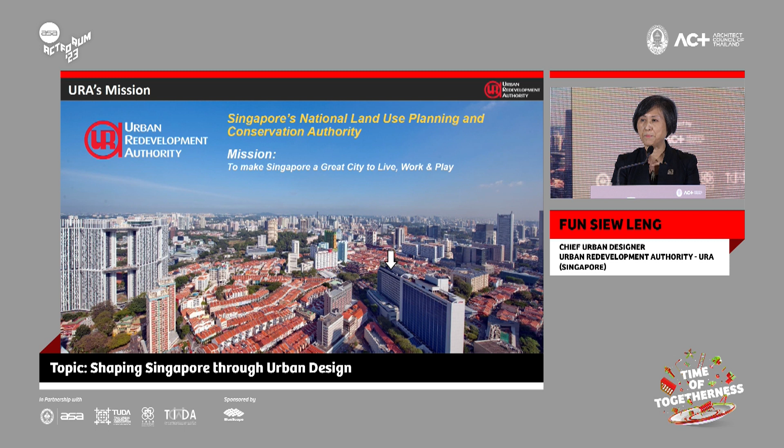But first, a short introduction. The Urban Redevelopment Authority of Singapore is Singapore's national land use planning and conservation authority. Our mission is quite simply to make Singapore a great city to live, work, and play. At the URA, we undertake land use planning, urban design, and development control work. We also coordinate infrastructure planning and promote the conservation of our built heritage.

Within URA, we also have a design and planning lab, which is a very recent setup to leverage on digital technology. So I will share a little bit on that later on how it has helped in our planning and urban design work.

To facilitate the implementation of our plans, state land is released for development through what we call the Government Land Sales, or GLS program, which I will also make some reference to later on. We also carry out place management of key areas in Singapore, such as at Marina Bay, and we also promote architecture and urban design excellence.

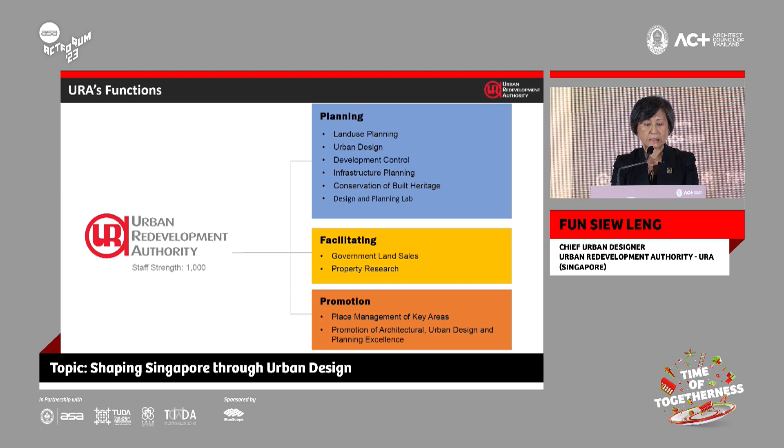To give a context, Singapore is a small island with a land area about 730 square kilometers, which is about half the size of Bangkok City. As you can appreciate, the combination of land scarcity and lack of natural resources remains a key existential challenge for us as planners. Our population is now at 5.6 million, which results in a population density slightly higher than that of Bangkok's.

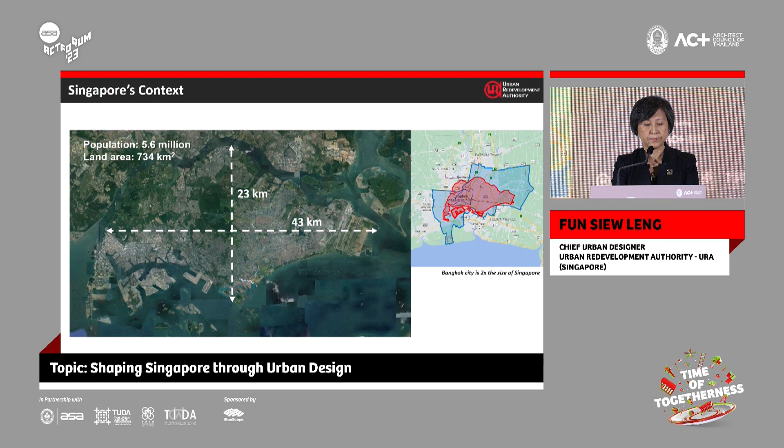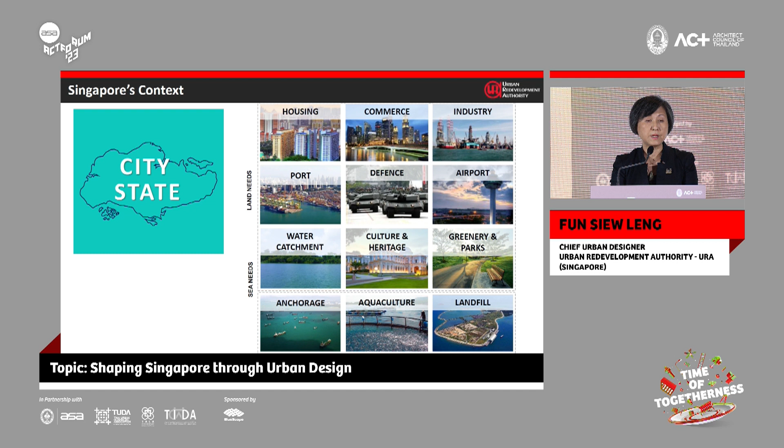Singapore is unique from other cities because we are both a city and a country. Within our very limited land area, we have to accommodate the many functions of a city, such as housing, commerce, and industry, as well as the needs of a country, such as airports, seaports, defense, and water catchment areas.

In order to meet the needs of the city-state, prudent planning for sustainable growth has been a necessity for Singapore from day one. We need to make sure that we balance across economic, social, and environmental considerations, and that our plans are flexible, resilient, and inclusive.

Our plans are guided by a systematic planning and development system which comprises 4 key components. There is the integrated long-term planning process and master plan, which are the plan-making components. There is also government land sales and development control, which help us to transfer our plans to reality. Urban design is done at the level of the master plan to help translate our long-term vision into implementable plans and policies.

To optimize its land and airspace, Singapore has to build denser and taller. Therefore, urban design is important to ensure that the living environment continues to remain attractive and offers a high quality of life.

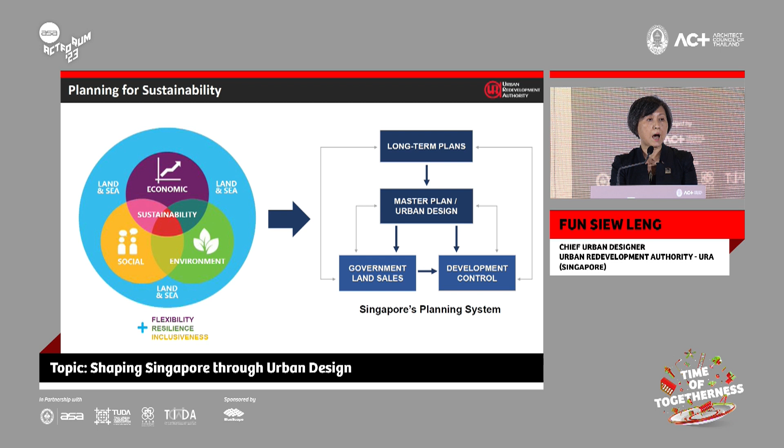There are 3 broad aspects that we consider in bringing our plans to reality. Urban design is a highly contextual discipline, and urban design interventions can only be successful when they address the specific local needs and issues. Our planners and urban designers strive to adopt a human-centric approach in our work, as ultimately we are designing for people.

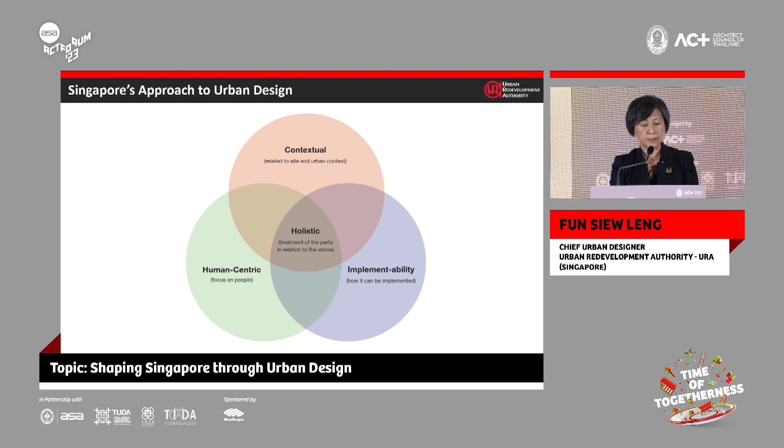To implement our plans, we have to leverage the use of policies and planning levers, which I will also discuss later on. We aspire for Singapore to be a distinctive, dynamic, and delightful city. Hence, we seek to achieve these outcomes through urban design that operates at the macro, meso, and micro scales, from sculpting skylines to streetscapes and public spaces.

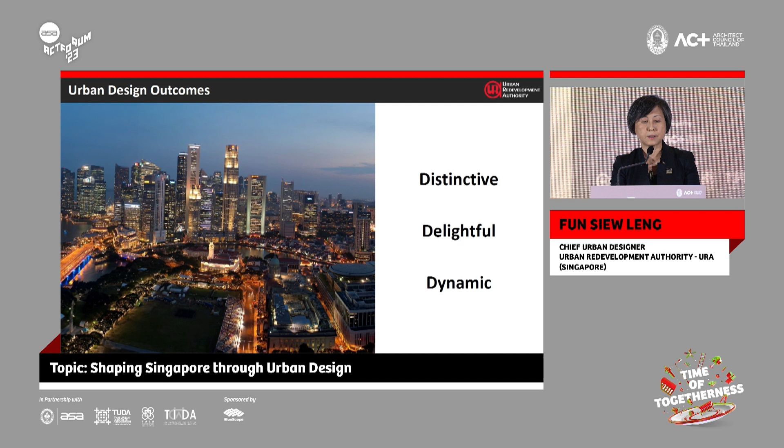At the macro scale, urban design covers the structure of a city, such as transport planning, land use zoning, development intensity, infrastructure network, and understanding the character of its various districts.

We have developed city-wide structure plans over the years, which serve as the guiding framework for URA's urban design work. They highlight how each district in the city can have its own distinctive character based on its geographic, natural, and heritage assets.

One of the most significant plans guiding Singapore's urban design is the seminal Central Area Structure Plan done in 1985. It was a comprehensive long-term plan for the Central Area that remains relevant today. The structure plan sets out in a clear hierarchy to guide rapid development in the growing city.

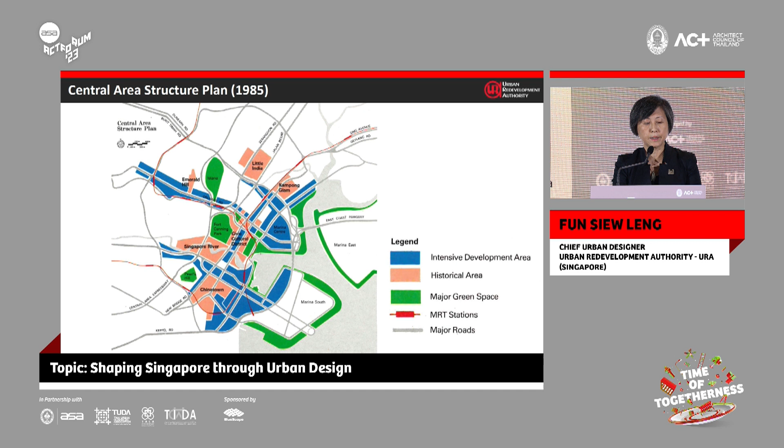The plan proposes to retain the existing historical districts and features and to concentrate new developments within these intensive areas shown on the plan. Moving from the structure plan, the district character plan defines the various districts in the central area based on their predominant land use, positioning, and geographical context.

Given that urban development of Singapore started in the city, urban planners and designers do not work on their plans and design from a clean slate or from tabula rasa. To illustrate the urban design plans and guidelines for Singapore River, one of the key districts in the central area, take reference from the presence of the river and the low-rise conserved buildings flanking it, ensuring new developments are kept low-rise at the riverfront while taller buildings have to be set back one block away from the river.

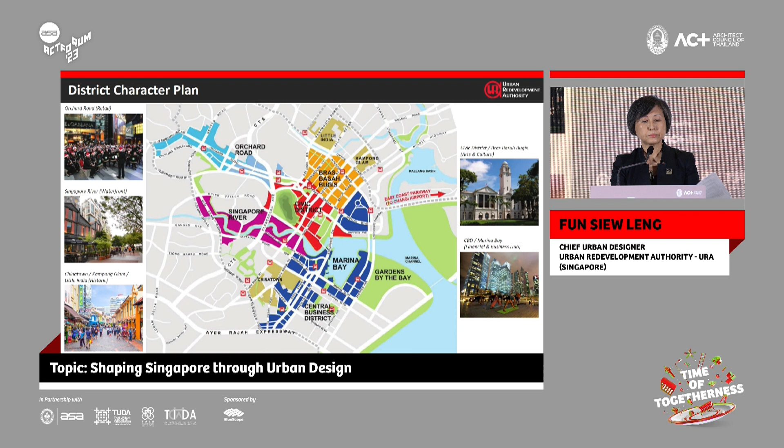Another key plan is our conservation plan. As we continue to develop, we are also mindful that our built heritage is a valuable reminder of our history and roots. URA's conservation plan identifies the areas with buildings with heritage value and ensures that new buildings or redevelopment within or near these areas will have to complement the existing conserved buildings. This plan has allowed Singapore to remain distinctive with our own identity.

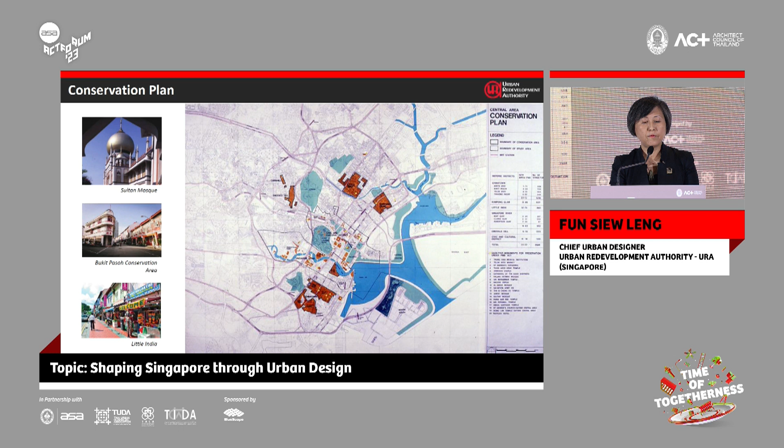To date, we have conserved more than 7,200 buildings. Many of these are in entire districts like Chinatown, Boat Quay, Kampong Glam, and Little India.

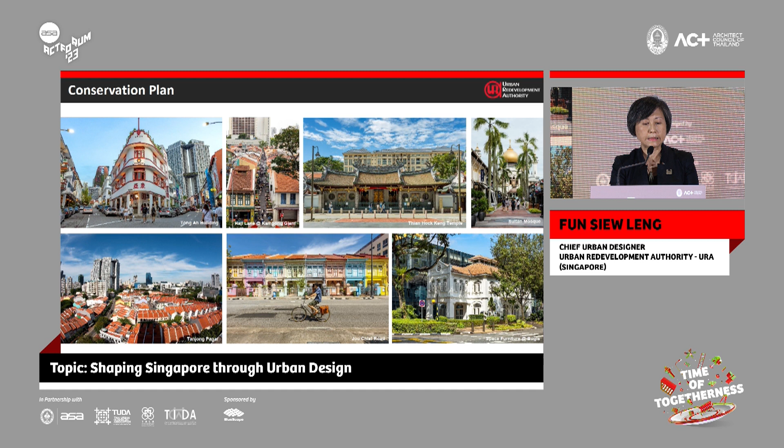The Landmark and Gateway Plan identifies landmark and gateway sites derived from the key approaches into the city center, and key sites which serve as markers in the city center. These sites will require high-quality architectural design befitting its location as well as special urban design considerations.

Establishing sight lines and vistas are helpful for curating activity spines, scenic views, and skylines. For example, when arriving into the city from Changi Airport along a lushly planted tree-lined boulevard, one is greeted with an unblocked view of the CBD with its skyscrapers set against Marina Bay.

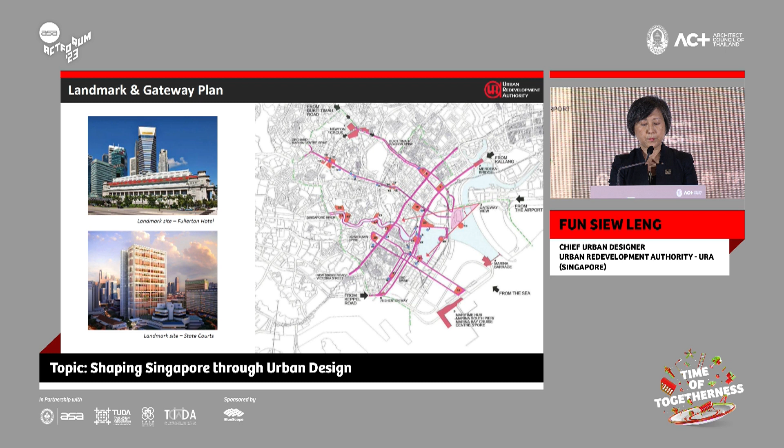At the meso scale, urban design focuses on the form of developments and building heights to achieve a distinctive urban identity. As urban designers, we organize building forms and building heights to sculpt the skyline and shape the physical character of the area. In this example here at Marina Bay, lower heights are planned around the bay to create a comfortable human-scale waterfront experience.

Higher heights are set back further to allow landmark sites to stand out as markers in the city. The variation of building heights creates a stepped, layered, and three-dimensional city skyline. It also maximizes views to the buildings as well as from the buildings to the bay. Seen as a whole, we get a signature skyline that we hope is a distinctive feature of Singapore.

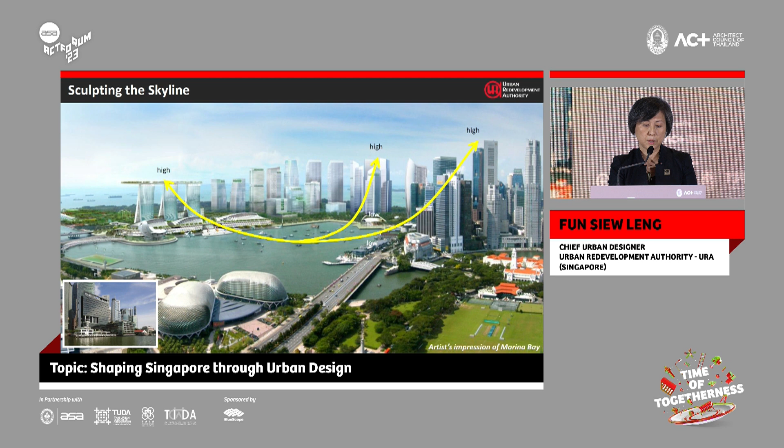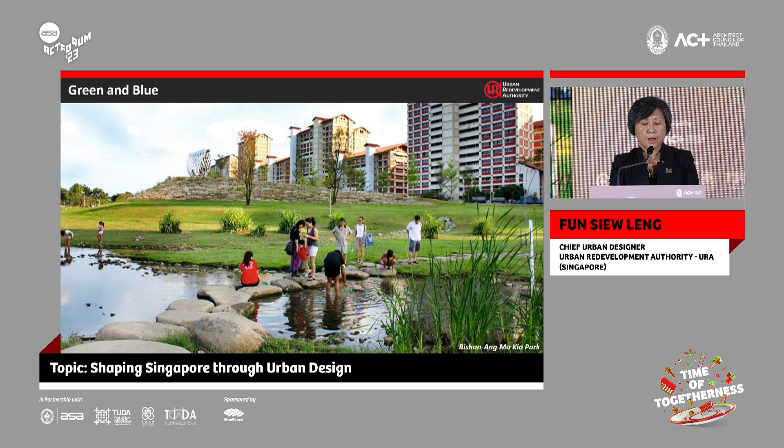Our natural features are treated as precious assets. We capitalize on our green and blue assets to give our city breathing space. Our water bodies provide attractive spaces for staging and enjoying water activities, even as they function as reservoirs, in this case here, and in many other places where we have been damming up our rivers to act as reservoirs. They also help to enhance the sense of islandness to our city.

Night lighting plays a very important role in defining the skyline of the city in the evening. We have a night lighting plan that has differentiated guidelines for the various districts in the city to bring out each of the distinctive characters of these districts.

Here in Marina Bay, coordinated night lighting conveys density and activity. The lighting is curated to be subtle and contemporary in character. This amplifies Singapore's image as a cosmopolitan metropolis, which is befitting of its status as one of the world's financial hubs. The lighting is focused on the building crowns to draw our eye upwards, allowing us to appreciate the city skyline.

Meanwhile, in the civic district, the focus is slightly different, where night lighting is used as a means of creating harmony and repose. Lighting is used to highlight the critical mass of historical monuments and used to grant them a sense of dignity and grandeur.

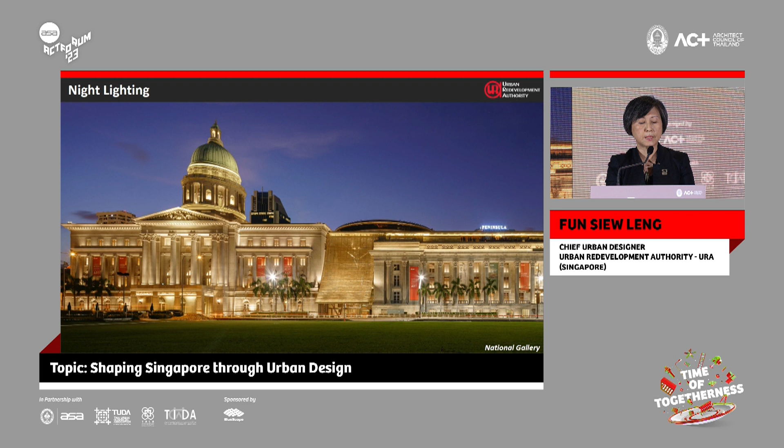The roof is an integral part of the form of individual buildings, but seen together as a whole, the roofscape of buildings can provide a unifying character for the district. For example, clay tiled pitch roofs are required for new buildings along Singapore River, allowing them to contribute to the historic river's coherent identity, blending in with the terracotta tiled pitch roofs of conserved warehouses and shophouses.

The roof in many situations becomes the building's fifth elevation. For example, the Esplanade Theatre is designed to be viewed from above as it is surrounded by much taller buildings.

Roofs can also double as attractive communal spaces. Rooftop gardens at Funan, seen here in the center picture, provide space for urban farms and events. Our urban design guidelines incentivize developers to design the roof as a usable space by giving additional gross floor area for outdoor dining, and we exempt the rooftop garden from the gross floor area computation.

At the Marina Bay Sands Sky Park and Infinity Pool, its rooftop provides great views of the city and doubles up as a place to wine, dine, and party. In all these examples, we have screening requirements for rooftop M&E services so that they do not mar our skyline.

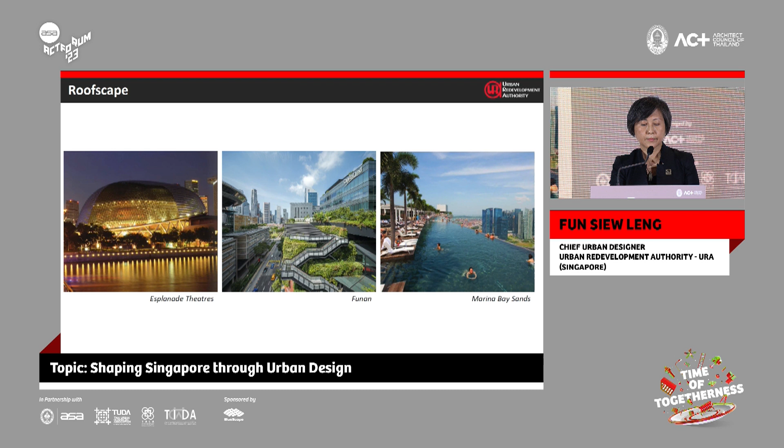At the micro scale, we consider the spatial experience at the street level and the human scale, which can be defined by building edges, facade treatment, and street fronting uses, including outdoor dining, public art, landscaping, and lighting. We strive to create streets that stir our senses, as it makes our experience of a city so much richer and more memorable. Active, vibrant streetscapes are integral to designing for a dynamic city.

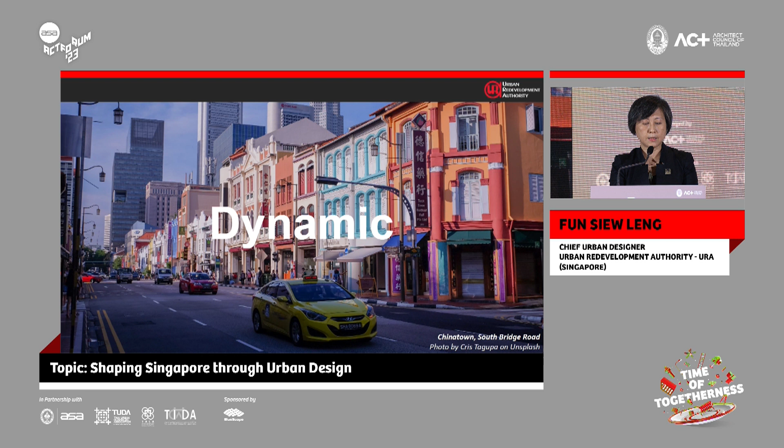An important element in a street for Singapore is the covered walkway, which has become an essential part of our city's pedestrian network. This isn't really a new invention, as covered walkways have been around since colonial times as part of the shophouse typology known as a 5-foot way.

Today, all commercial buildings along major routes in the central area are required to provide covered walkways, which are much needed in our hot and humid climate. By making our streets more walkable, we also facilitate the adoption of public transport, which is very much needed in Singapore, as we cannot afford to continue setting aside more land for roads.

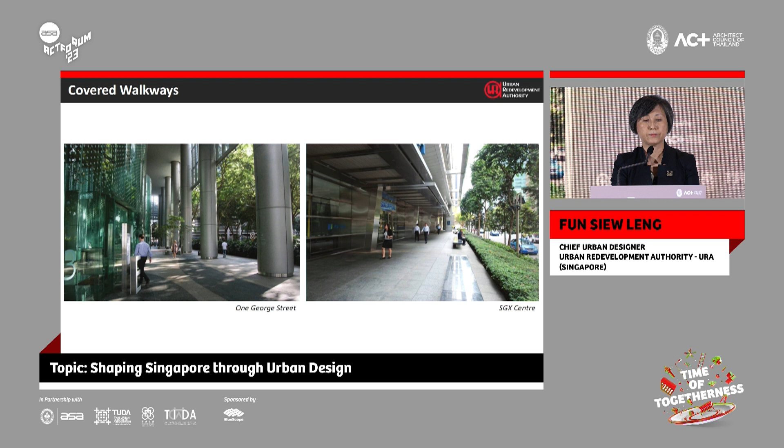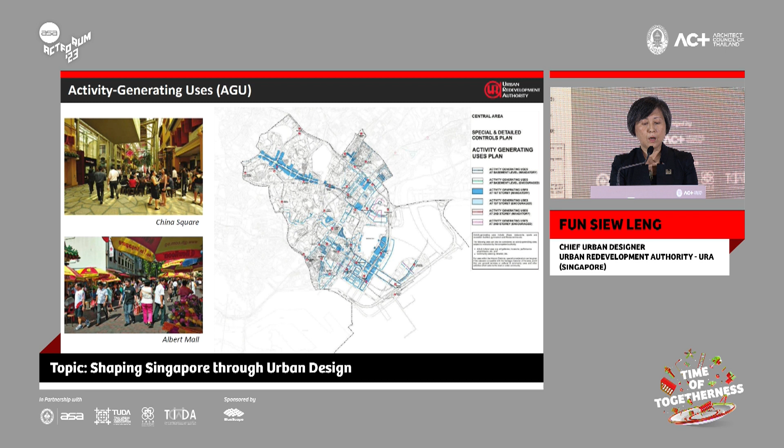We plan for active uses, such as retail and food and beverage outlets, with direct access along main pedestrian routes to ensure the vibrancy of these streets. Active uses, particularly on the first storey of developments, are a mandatory requirement for developments along the key activity corridors, as shown in the earlier slide on the structure plan of the city. For example, we would require active uses along both sides of Orchard Road, which is Singapore's main shopping street.

To complement these active uses, outdoor refreshment areas are encouraged to front streets, promenades, and pedestrian malls. Outdoor refreshment areas add visual interest at the eye level, which is also important to engage with pedestrians. Most importantly, of course, dining outdoors is a way of life for us in Singapore, because people just love eating outdoors.

Given that all our MRT stations in the city centre are underground stations, we have also planned for an underground pedestrian network, or UPN for short. The UPN acts as a major pedestrian mover system in the city centre where the density is high, and this complements the street-level pedestrian network. And of course, everybody loves the UPN because it provides all-weather protection for us.

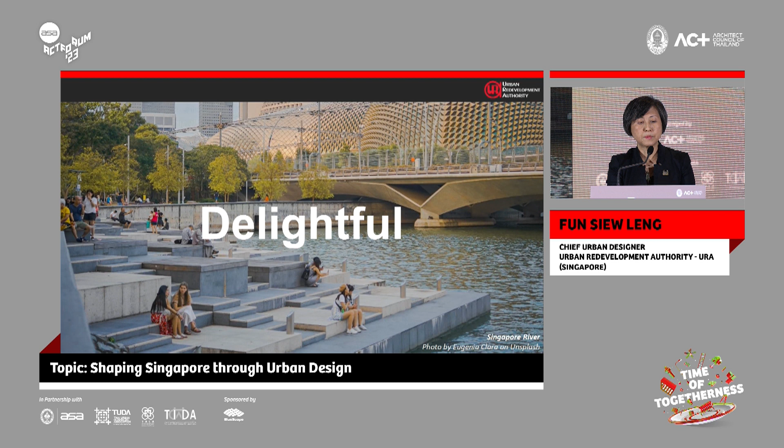Public space is one of the important elements that makes the city delightful and livable, and we strive to make these places friendly and accessible for everyone to enjoy. In the planning of an area, the most critical part for the urban designer is how to plan for the people.

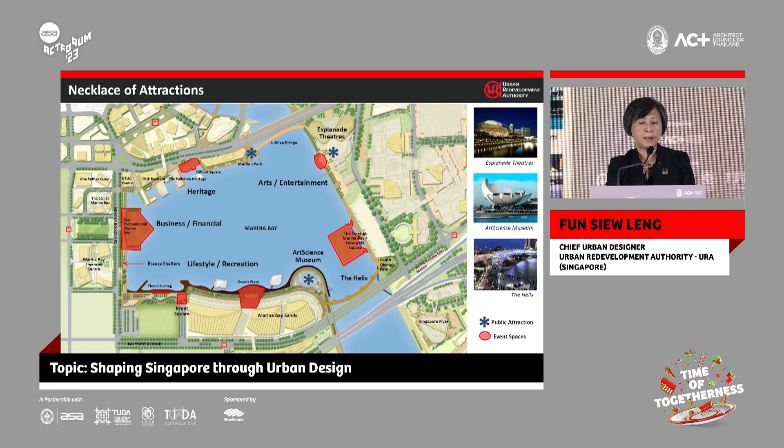Marina Bay is planned as a people's bay. We wanted to ensure that the most attractive parts of the bay are publicly accessible to all and at all times. Here's another view of Marina Bay from above.

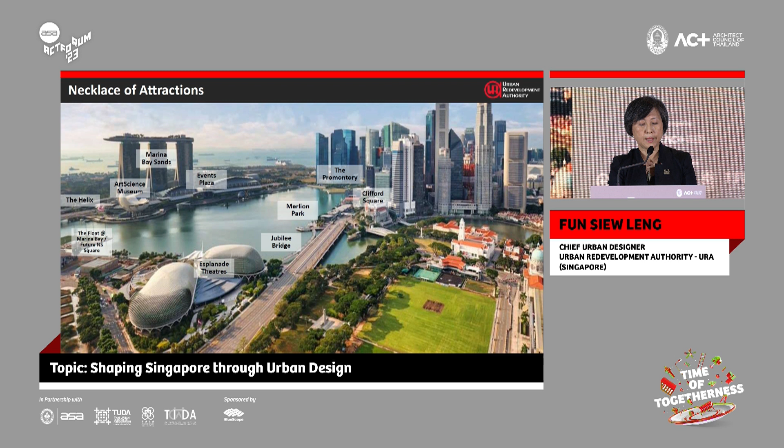At the heart of Marina Bay is a continuous 3.5 kilometer long waterfront promenade, which links many sites of interest together to form a necklace of attractions around the bay. The boardwalk around Marina Bay takes advantage of the universal appeal of water and enhances the urban relationship with water by bringing people closer to it.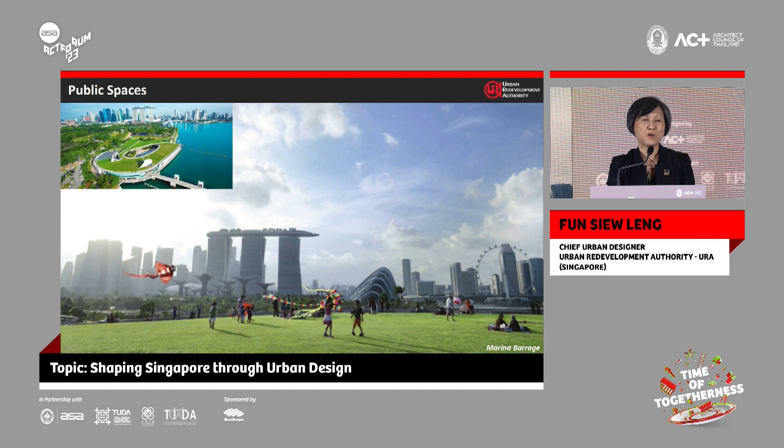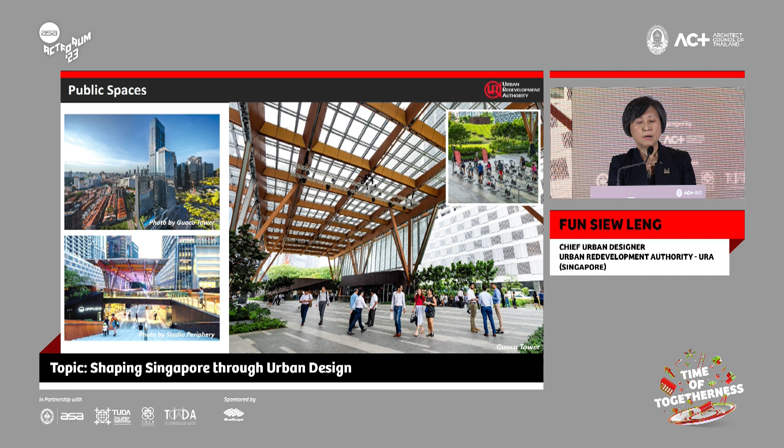The European typology of piazzas and plazas is not really suited for our climate. In a hot and humid climate like ours, it is important that we provide public spaces that are comfortable for people to gather and linger. So we have to make sure these public spaces are well shaded. These spaces function as what we call the living rooms of the city, and they are very important venues that are sheltered from the elements.

We are always looking for opportunities to bring in new users to activate the city. We have a program called RSVP, or Reinventing Spaces into Vibrant Places, that allows us to tender out vacant state-owned buildings to bring more interesting users into the city. We invite the private sector to propose innovative ideas for these buildings that can bring in new activation. Their proposals should plug the gap in the offerings in that part of the city, and we evaluate the tender by giving higher emphasis to the quality of the proposal rather than just the tender price.

And what is life without art? Public art is one way of breathing soul into our city. Public art in the city started with our art incentive scheme that was launched in 2005. In this scheme, we gave additional gross floor area for developers to provide public art in their development, equal to the value of the artworks, to encourage developers to incorporate this artwork.

Over time, developers realized the value of investing in such public artworks, and they have started doing it even without our incentives. For example, this particular example was realized by the developers after the lapse of the incentive scheme, and this artwork is at CapitaGreen, an installation of dense root-like columns that blurs the line between structure and nature.

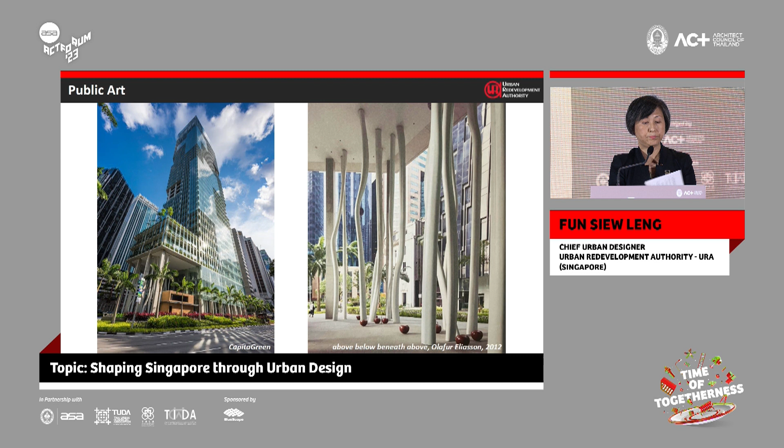Storytelling is also an important part of bringing the history of our city to life. Sculptures along the Singapore River Promenade help us recall the former activities and way of life along the river.

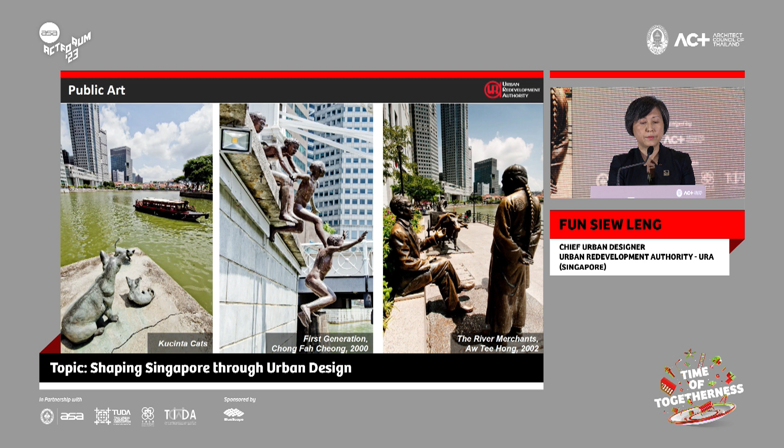And what happens when the street is temporarily disrupted due to construction activities? Not very different from here in Bangkok, where you also have very nice examples. Here at Ophir Road, there is a massive underground road that's being built. And instead of leaving the blank hoardings as they were, we saw this as an opportunity to soften the impact of the construction and to celebrate the artists in our community.

Hence, our creative hoarding program, supported by the Lively Places Fund administered by the URA, allowed these hoardings to become a canvas for the community and to showcase its unique street art culture.

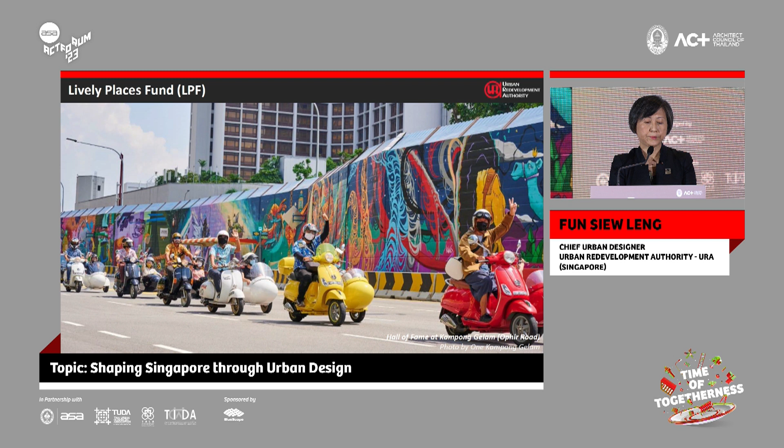I have just spoken about our urban design aspirations and strategies, but equally important is how we get them implemented. What is our palette of tools, policies, and levers that allows us to translate our plans into reality?

We are fortunate that our government owns more than 80% of our total land area. We release state land by tender for the private sector to undertake development through the government land sales program. Being the land sales agent for the government, this has been instrumental in allowing URA to translate its plans into reality.

When a land parcel is launched for sale, URA will prepare the technical conditions of tender, which includes all the urban design requirements that the successful tenderer must adhere to. In this example, the Capitol Theatre is one such sale site, where we required the development to turn a former unattractive service lane in a very historical development site into a galleria, flanked by shops and restaurants, thereby creating a new destination in the city.

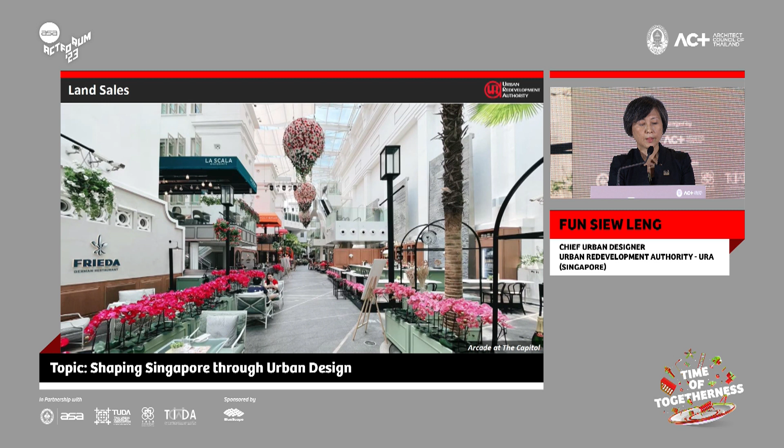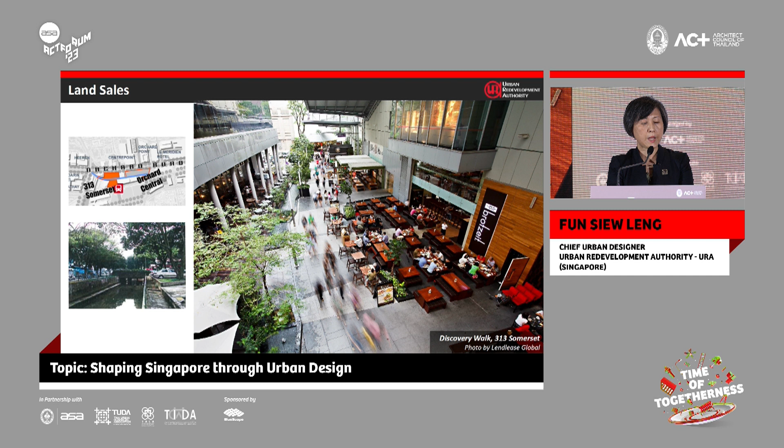Similarly, in Orchard Road, when we sold two adjacent sites next to an open canal, we required the open canal to be decked over and flanked with active uses. Today, the canal has become what we call the Discovery Walk, and if you have been to Orchard Road, this is in the Somerset area. It's a great example of successful urban rejuvenation, where infrastructure space is transformed into a lively, well-used pedestrian mall.

How do we go about procuring high-quality developments with innovative concepts? For strategic sites in the city, such as the South Beach development at Beach Road, designed by Norman Foster and Aedas and developed by CDL, we use a concept and price revenue tender approach.

At the first stage of the tender process, the concept proposals that have substantially satisfied the evaluation criteria would be shortlisted. Then we open the price envelope of only the shortlisted concept proposals.

The site would then be awarded to the tenderer with the highest bid among the shortlisted proposals. Even if you have not visited Singapore before, I'm sure you will recognize this building from the Crazy Rich Asians movie. The Marina Bay Sands Integrated Resort was realized through a fixed price tender. Normally, all land sales in Singapore are tendered and awarded to the highest bidder, but in this case we fixed the price and they had to compete on their concept proposals.

We set the price then, back in November 2005, at 1.2 billion Singapore dollars, and in the end Las Vegas Sands was awarded the rights for this site. The key factors in the winning bid included the Art Science Museum, the big public space to stage events at the waterfront, 100,000 square meters of MICE facilities, and the daring Sky Park observation deck perched 200 meters in the air.

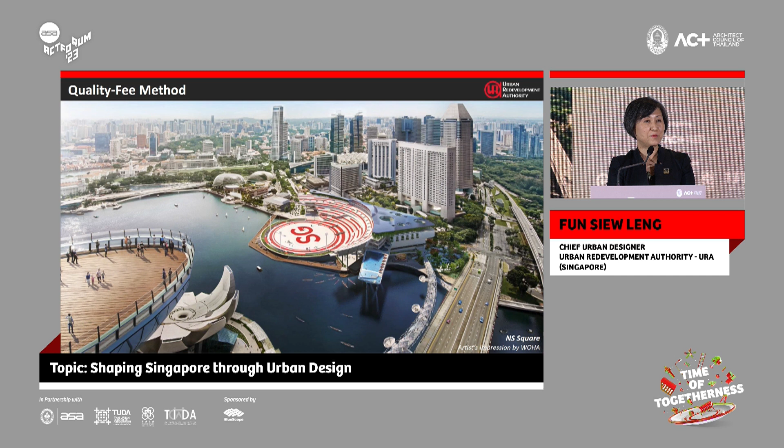For this project, we used a quality fee method to procure the best design, where strong emphasis was given to the quality of design, and the design was awarded to none other than Mr. Wong Mun Summ here. In a few years' time, if you visit Singapore, I'm sure you'll appreciate how wonderful this new addition will be to our waterfront.

For very strategic projects, we go for open design competitions to tap on a bigger talent pool for new ideas. What you see is the result of an international design competition where we invited architects to reimagine a new housing typology for the first 50-story public housing project, providing a highly attractive super high-rise, super dense living environment.

This kind of competition is judged totally blind, to allow talented architects the opportunity to work on large-scale public projects that may otherwise not be available to them, especially when track records are required. Out of more than 200 design entries from all over the world, the entry Sky Houses Flying Green by a small local firm known as Arc Studio Architecture and Urbanism emerged as the winner.

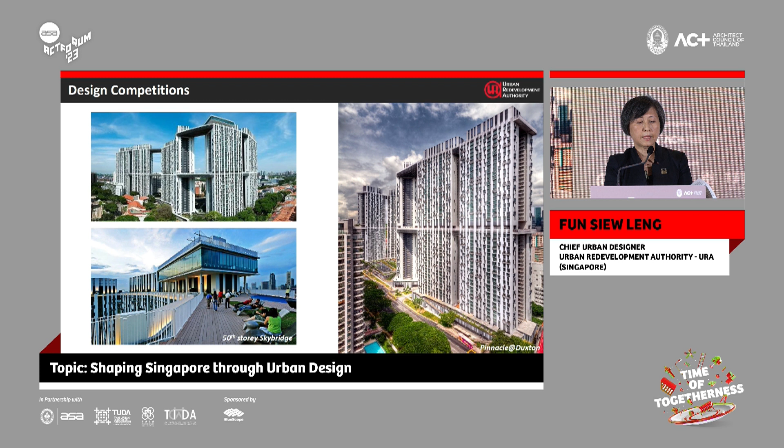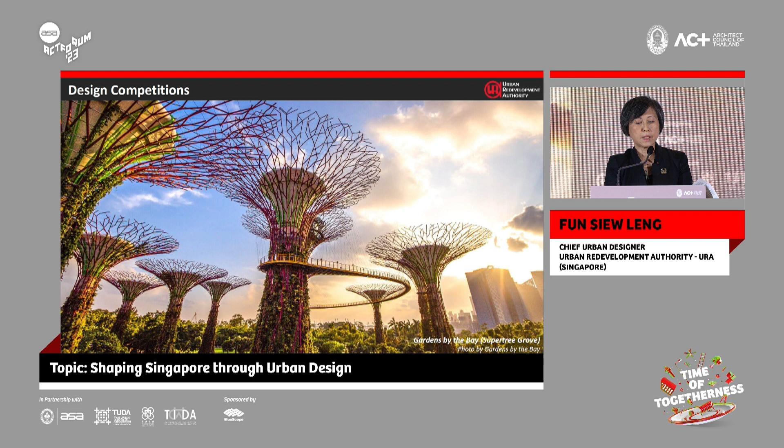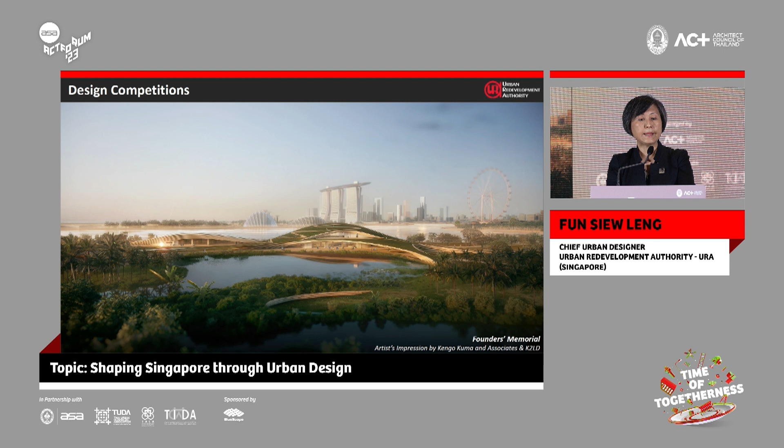Other examples of open design competitions include Gardens by the Bay, designed by Grant Associates and Wilkinson Eyre Architects. Another is the Founders Memorial by Kengo Kuma in collaboration with Singapore's architecture firm K2LD. This is now being developed, and in another few years' time, by 2027, it will be completed, located in Marina East, across from Gardens by the Bay in Marina South.

You have seen this project, but we love to use this project to illustrate my points. At URA, we develop policies to achieve development objectives.

One such example is the landscaping for urban spaces and high-rises, or LUSH for short, where new developments and major A&A projects in key areas in the city center are required to replace 100% greenery within the development. The objective is to create more opportunities for users to be close to greenery, even as we build taller and denser.

As Mun Summ has already spoken earlier, greenery cools our buildings and lowers the ambient temperature. This is really a way of us also creating our own architectural design for Singapore. We have so many good examples that Mun Summ has shared, and I'll continue to show in the next slide.

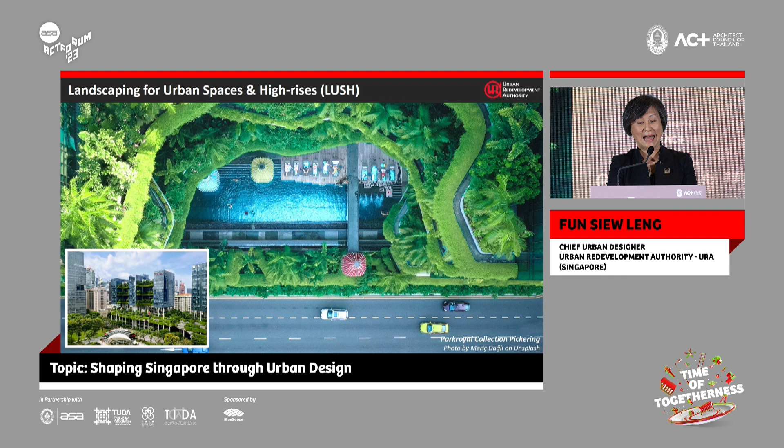This LUSH program has also allowed us to create rooftop community farms, as in this project by Mun Summ called the Kampung Admiralty, because the community farm can be used as part of the fulfillment for the greenery replacement requirement.

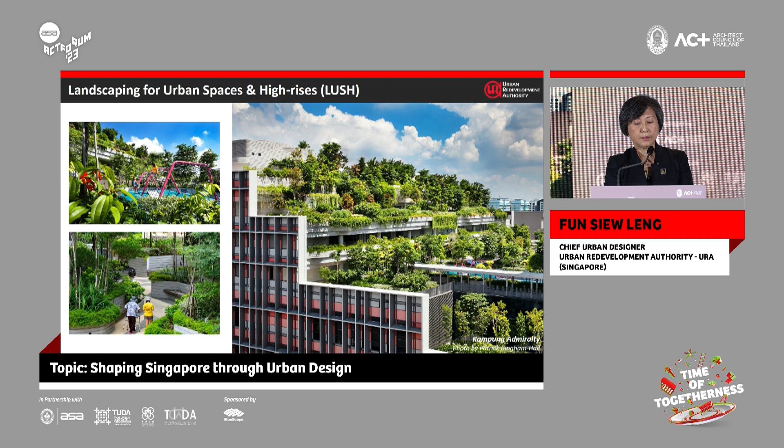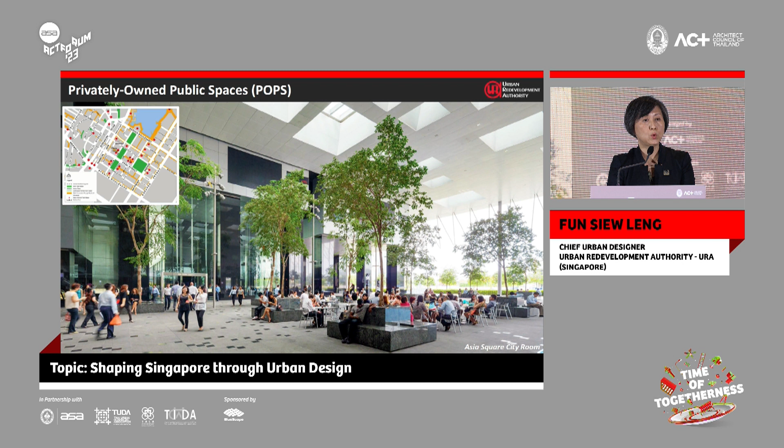These public spaces, although we require them, are exempted from what we call gross floor area computation. So in effect, the developer will not lose any of their developer floor area.

I mentioned about outdoor dining. To enliven our public spaces, we either carve out spaces for what we call temporary occupation license for outdoor dining, or we give the developer or building owners additional gross floor area so that they are incentivized to provide outdoor dining that front key streets and public spaces.

So I've been mainly talking about the hardware. But it's also important that we consider the software, which makes a city dynamic and delightful. Hence, placemaking has become an important part of enlivening our city.

As the place manager for Marina Bay, we, URA, manage the public spaces around the bay, and work with other agencies and the private sector to bring activities and events to the bay year-round.

URA also organizes two key annual signature events with the objective of making Marina Bay a bay of celebration and the people's bay. Here we have iLight Singapore, an annual celebration featuring artists from all over the world using sustainable light art installations.

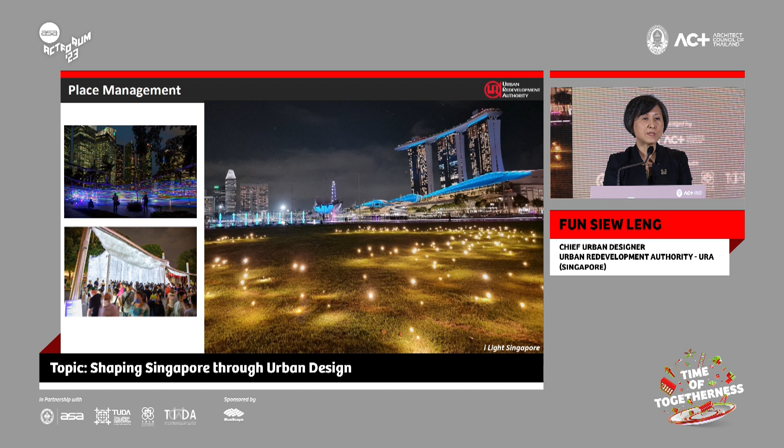I would like to invite all of you to Singapore on 1st of June, because we are staging the next edition, the 9th edition of our iLight Festival. You're all very, very welcome. It's free to the public—anybody can enjoy our city in the evening when it's really nice and cool.

The other signature event at Marina Bay is the Marina Bay Singapore Countdown.

We also encourage the private stakeholders to do more, to undertake place management and placemaking, so as to bring about more economic and social vibrancy to their own districts in a much more sustainable way.

So we started the pilot Business Improvement District program in 2017, drawing inspiration from the UK and the US, to encourage precincts to form BIDs to undertake place management and placemaking initiatives on their own.

For the pilot phase, the Singapore government provides dollar-to-dollar matching funding to the BIDs, which raise their own funding through their membership to carry out initiatives to promote their own districts, such as light-ups.

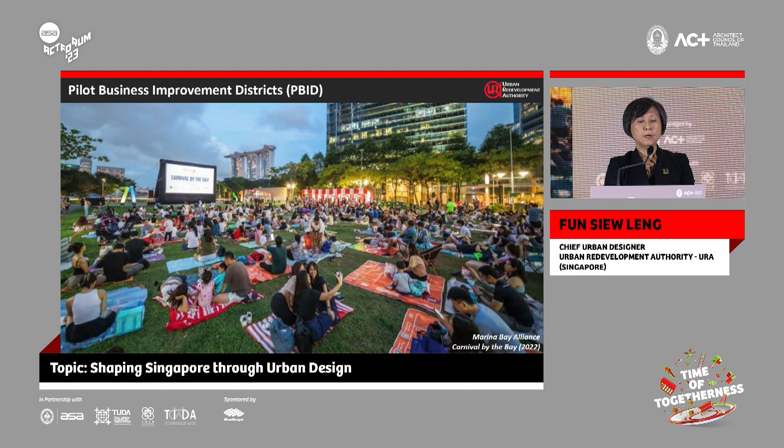Events, festivals, festive bazaars, including installing more public seating and public artwork, and undertaking promotional events for their district.

The idea is that stakeholders know best what they need for their own precinct to bring benefits like footfall, longer dwell time, more spending, etc. BIDs also promote social cohesion and empower stakeholders to take greater ownership in shaping their own precincts.

We think that this is a much more sustainable way, instead of government always having to organize events for every district, which is not easy. And in between the big events, what happens? So this is one way of making sure that stakeholders can sustain their own precincts.

I would like to round up by sharing how urban design has evolved to meet the challenges of climate change, energy crisis, social inequity and stratification, as well as the opportunities afforded by new digital technologies.

I would like to use the newly completed master plan for Marina South, a mixed-use residential neighborhood in Marina Bay, to illustrate my points.

Marina South is an area of 60 hectares that sits between the Gardens by the Bay and the southern coast of Singapore. It seeks to redefine city living as a forward-looking mixed-use neighborhood.

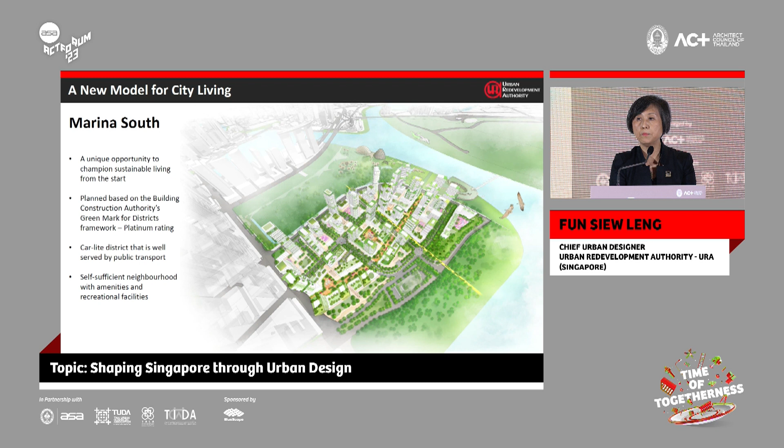There are three outcomes driving this new model for city living. First, a 10-minute neighborhood, a mixed-use residential neighborhood with retail, hotels, offices, amenities and public transport, all within a 10-minute walk.

Second, a green, blue and cool urban oasis planned based on sustainability principles. The neighborhood, surrounded by gardens and water, supports eco-friendly lifestyles.

Developers will be required to adopt sustainability-driven initiatives from the design stage onwards. Third, a community-centric neighborhood for all, a convivial public realm to support the building of socially resilient, multi-generational communities.

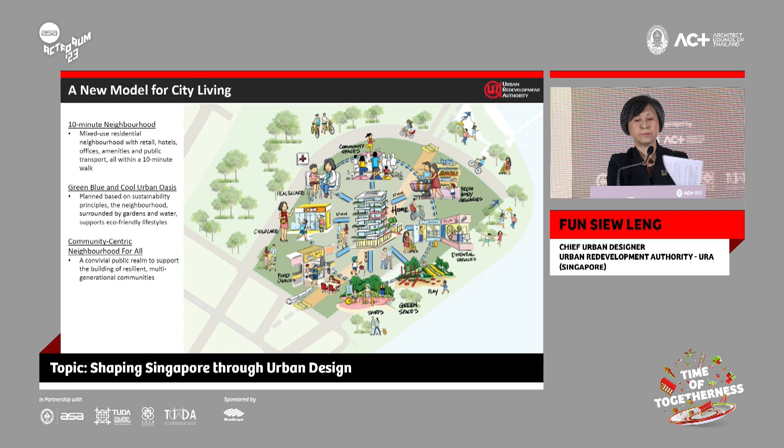Marina South has an extensive network of public spaces which are interconnected through walkable streets, mid-block shortcuts, covered walkways, underground pedestrian links, and elevated pedestrian walkway. The 800-meter-long pedestrian mall sitting above the MRT tunnel is the key spine that links these various networks together. The pedestrian mall is bookended by the MRT stations, and it is lined with active uses like food courts, supermarkets, cafes, retail, service, and amenity shops.

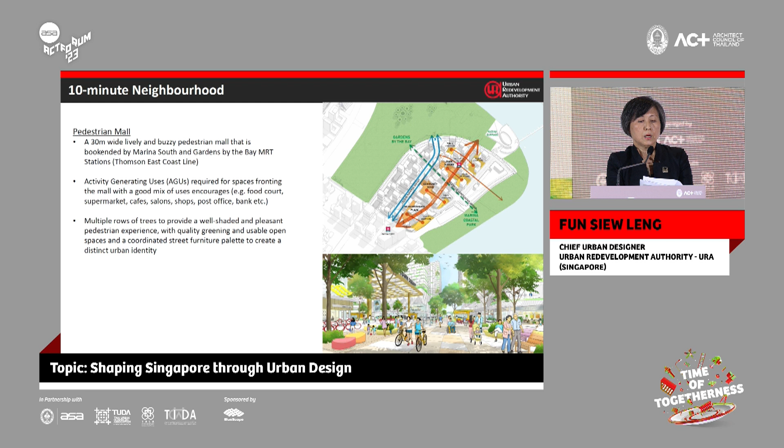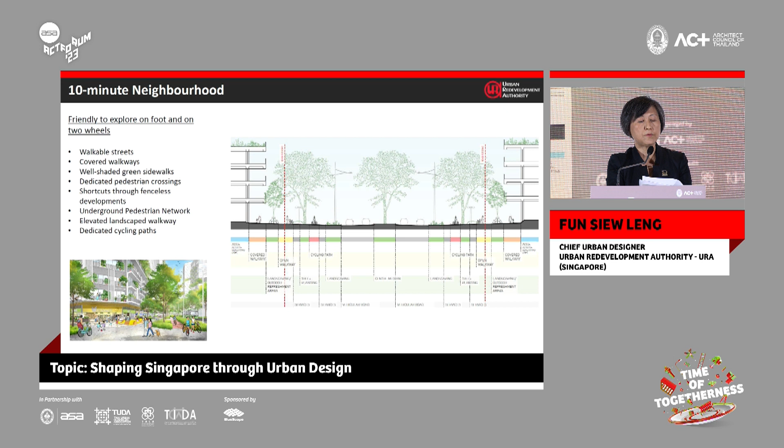To keep the neighborhood lively, developers will be encouraged to utilize building setbacks to design well-shaded informal community spaces incorporating street furniture and large landscaping.

To achieve a 10-minute neighborhood, the ground plane is kept porous to allow shortcuts, giving priority to how pedestrians walk. We therefore require through-block links, linking streets to streets through the development, so it's a fenceless kind of development. An underground pedestrian link located beneath the pedestrian mall will also ensure weather-protected connections between developments and the 2 MRT stations.

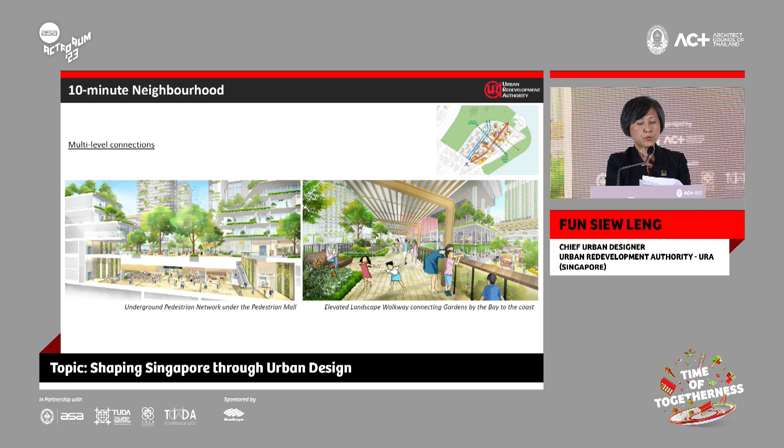Similarly, an elevated landscape walkway with lush planting, rest places, and rain shelters will provide a comfortable shady connection linking Gardens by the Bay to the north of this district to the south, which is the Marina South Coast.

The building form and massing in Marina South are studied carefully to not only create good scale, well-defined streets and spaces, but also to optimize wind and shading given Singapore's climate.

Optimizing wind flow and lowering ambient temperature is a collective effort and shared responsibility. Hence, we have adopted a courtyard typology with building blocks placed to create wind corridors to channel wind to key streets, public spaces, and residential blocks.

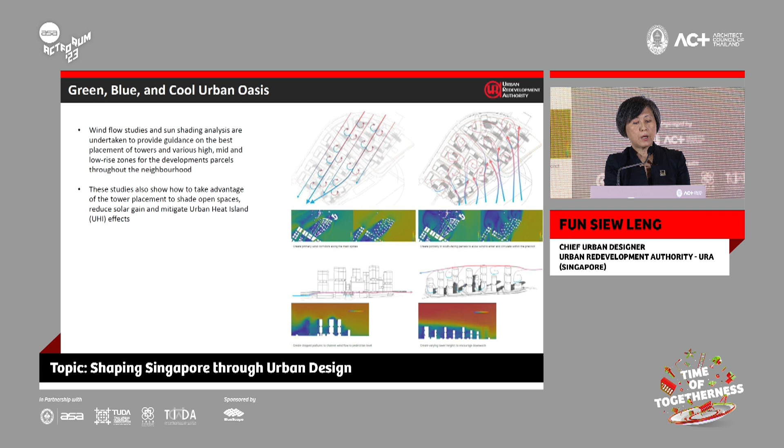No-build zones and wind corridors are guided to ensure that the predominant northeastern and southern winds are channeled through the district. This can help mitigate the urban heat island effect, encourage the use of natural ventilation, and reduce reliance on air conditioning. And we use new digital tools to help us arrive at this.

As energy consumption is one of the primary sources of carbon emissions in the development, increasing energy efficiency will go a long way in achieving better sustainability outcomes. Developers are required to adopt measures to achieve a higher standard of energy efficiency, reducing energy consumption and reaping significant cost savings over the long run.

They can achieve this by adopting measures such as tropical architecture with a focus on natural ventilation and minimizing solar heat gain. Developers will also be encouraged to adopt development-level centralized cooling and energy monitoring systems. They also need to provide EV charging points to facilitate the adoption of cleaner and greener forms of transport in their car parks.

Reducing the carbon footprint of the precinct is a key priority in Marina South. All developments will need to achieve Green Mark Super Low Energy Platinum certification with maintainability, whole of life carbon, and health and well-being badges. This allows developments to achieve at least 60% energy savings compared to the 2005 building codes.

Developers will also be encouraged to adopt sustainable waste management measures, such as implementing publicly accessible recycling collection points, composting facilities for food waste, water-sensitive urban design features, and development-level pneumatic waste conveyance systems to ensure sanitary and odorless waste collection.

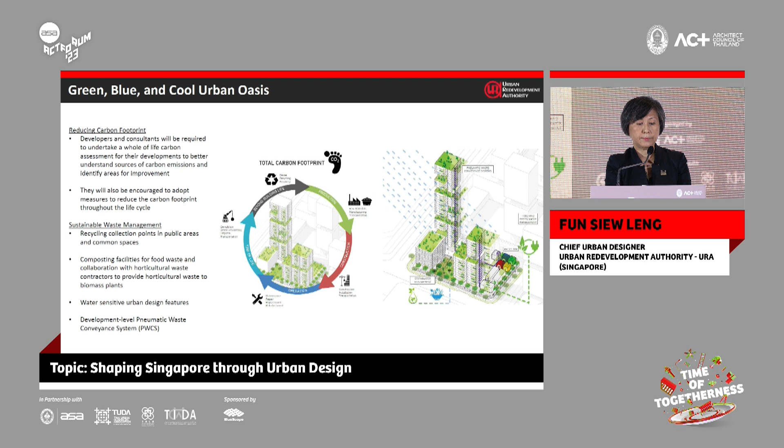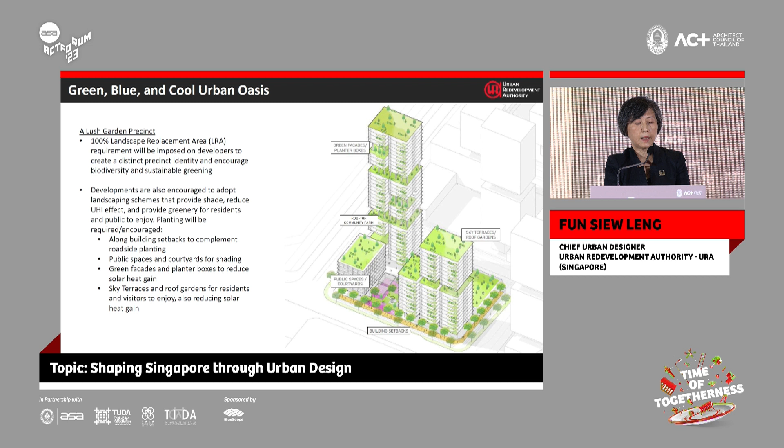Developers are required to provide landscape replacement area equivalent to the site area of the development. To create a distinctive precinct identity and encourage biodiversity and sustainable greening, they are also encouraged to use native species of plants. Rooftop farming is also encouraged and counted towards fulfilling the landscape replacement area requirement. As mentioned earlier, these serve to reduce solar heat gain to the developments and reduce our cooling load on the building.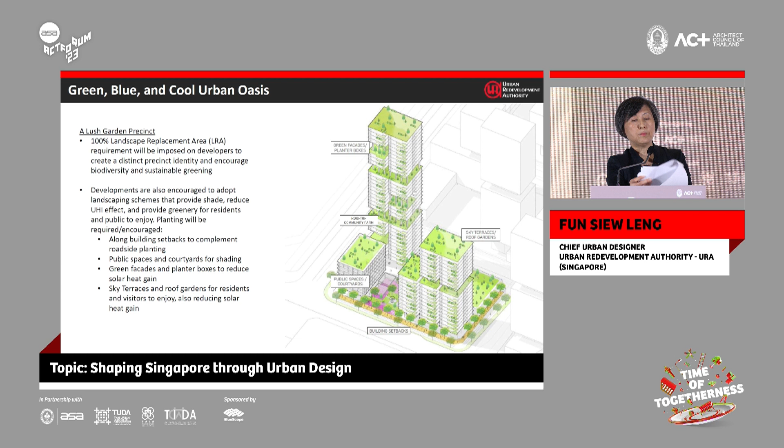A key focus for Marina South is how to create a community-centric neighborhood where residents feel that their needs for services as well as for social interaction and community bonding are met.

Developers are required to work with government agencies to provide facilities to cater to the needs of the community, such as childcare centers, senior care facilities, and other multi-purpose community spaces. These amenities have to be located prominently, fronting public spaces and key streets to ensure convenient access to the users.

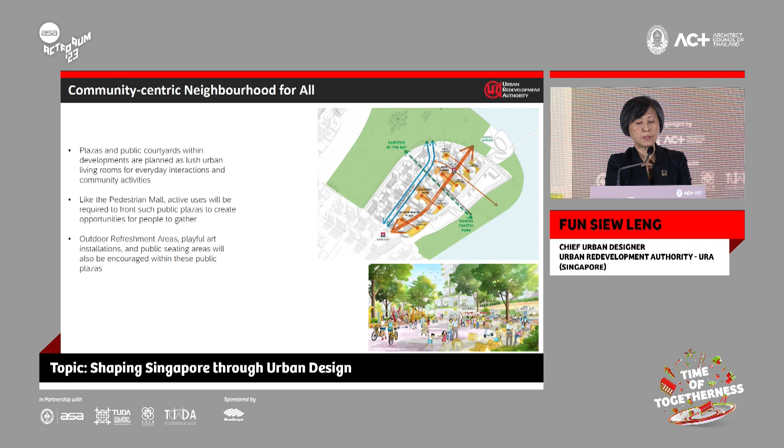Privately owned public spaces within these developments are planned as urban living rooms for everyday interactions and community activities. We will also encourage developers to design multi-generational public spaces with facilities to cater to the needs of users ranging from children to the elderly, such as locating playgrounds together with age-friendly fitness corners, fronting shops or cafes, allowing users of all ages to congregate.

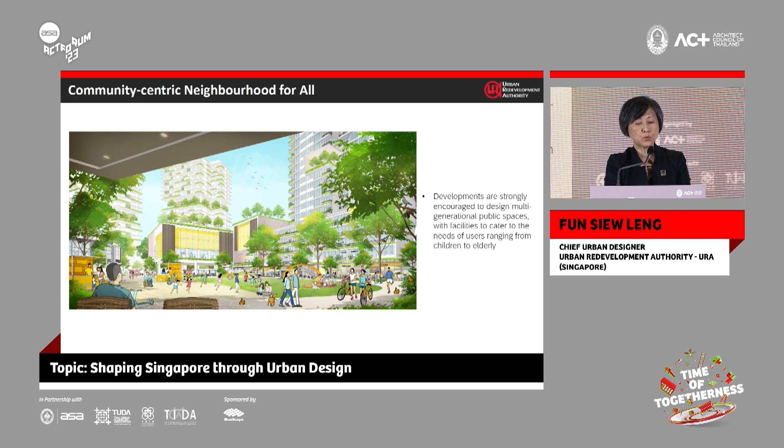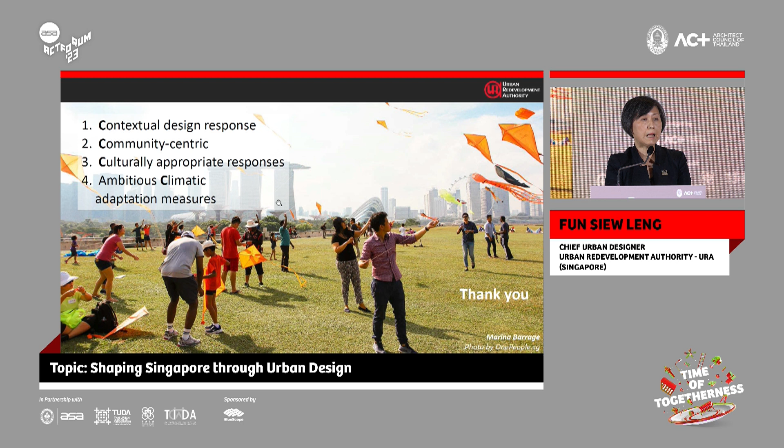While there now exist many new technology and software tools, as you have seen how we help our planners and urban designers arrive at optimal evidence-based design solutions, it is even more critical that we set clear long-term objectives centered on solid fundamentals. I wish to conclude my talk with 4 C's we must adopt in our planning and urban design work: contextual design response, community-centric design for the people, culturally appropriate responses, and ambitious climatic adaptation measures. This will allow us to achieve a sustainable, happy, and healthy living environment for all.